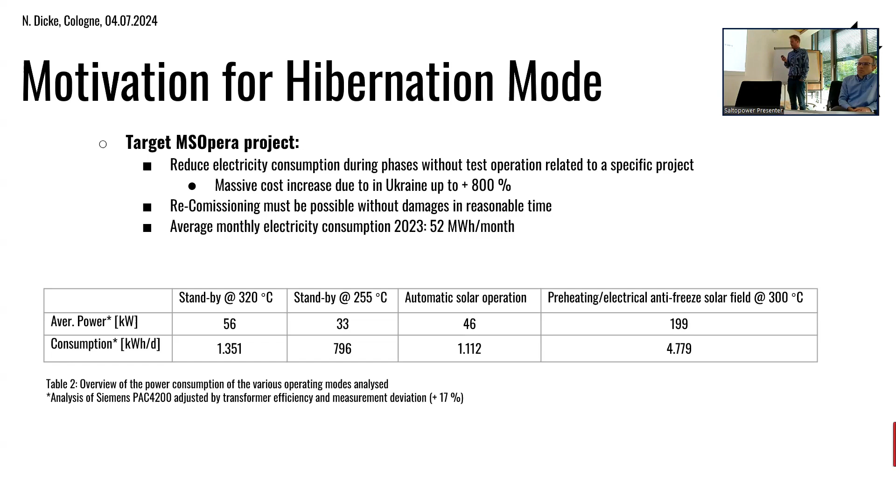We have here the automatic solar operation, which is something in between. And then we have the huge part of preheating and electrical antifreeze in the solar field. So we have impedance heating of the collectors, and if this is running at a set point of 300 degrees, we're using like 2 times what a household would use in a year.

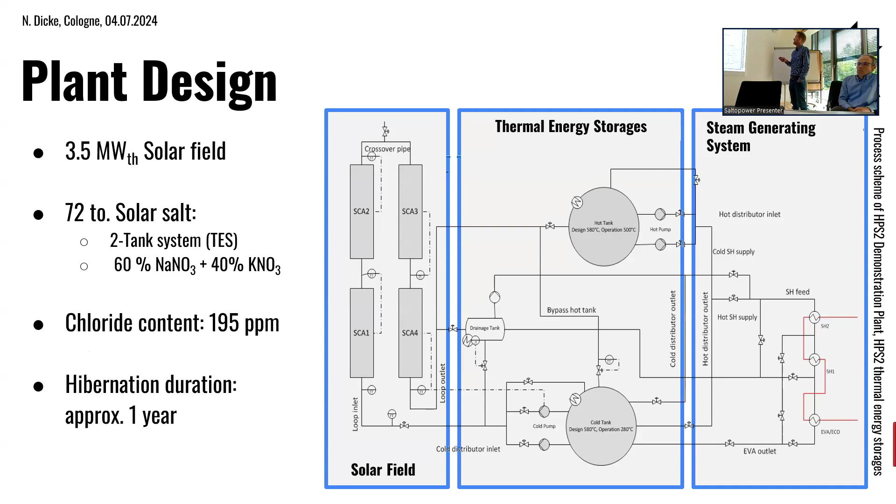Shortly to the plant design, I will just go quickly through it as Paula already presented. So it's a 3.5 megawatt thermal solar field, and we have here our thermal energy storage with roughly 72 tons of solar salt.

And we will also look a little bit more in detail into this part here as we use that for the salt dilution process. We did some measurements of the chloride content beforehand of the salt dilution, but I will come closer to this when we talk about corrosion later.

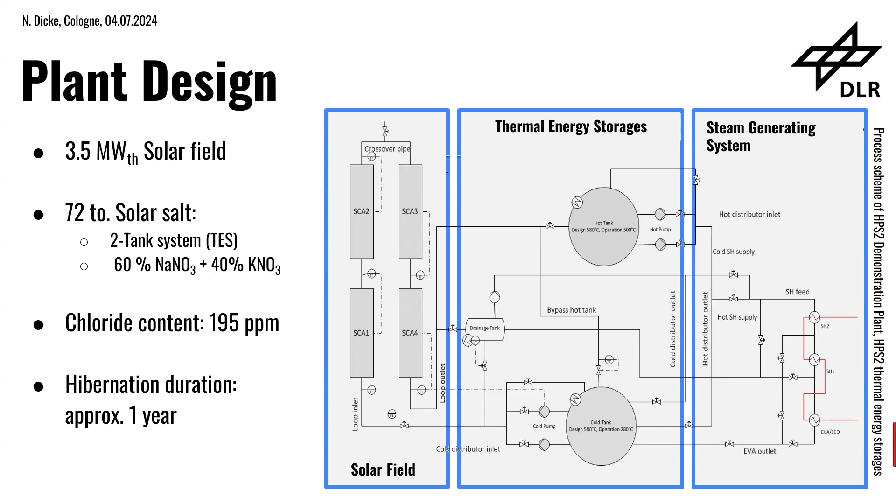And now we are facing a period of roughly 1 year where we are in the hibernation mode, and I will show now the concepts. So we evaluated in general 2 concepts: freezing and melting in the storage tanks, and the other concept is the salt dilution concept.

We did a risk assessment to see what are the risks, how likely they will appear, and what would be the severity of this. And yeah, all processes or all risks which are in the A matrix should be avoided.

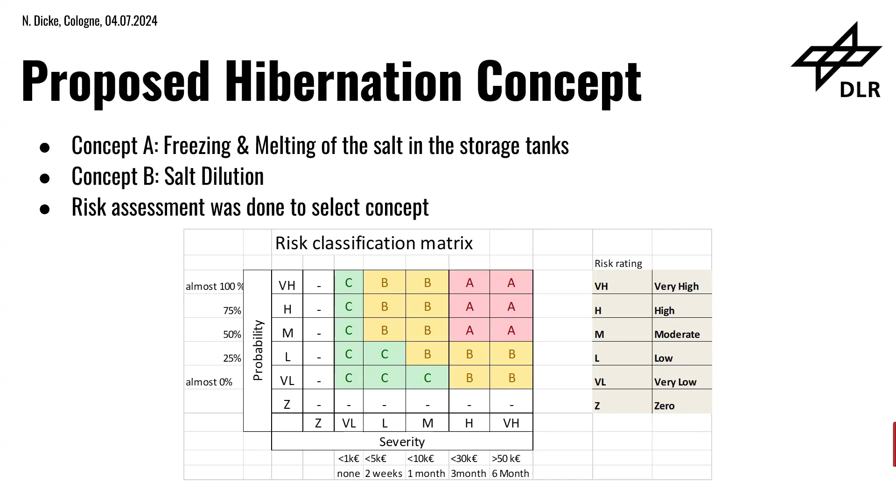Let's take a small look into the freezing and melting. We did some pre-engineering to see what would be the effort, what would be potential risks. So for the heating, or freezing - let's say the melting of the storage tank is a complicated thing, because the freezing you just turn off the heating and everything will freeze. But the melting would be difficult, especially as we don't have trace heating yet around the tanks.

So this would need to be installed. All the insulation cladding needs to be removed. We need to do electrical installation and the installation of the heating circuit on the outer surface. And this, of course, is rather expensive. We had some quotations of 60 to 80,000 euros per tank.

And when it's then stored for a year, the air volume in the tanks should also be conserved with nitrogen in the best case. And then if you start up, the plan is also to preheat the air volume here to have the lowest possible heat temperature gradients. This is also...

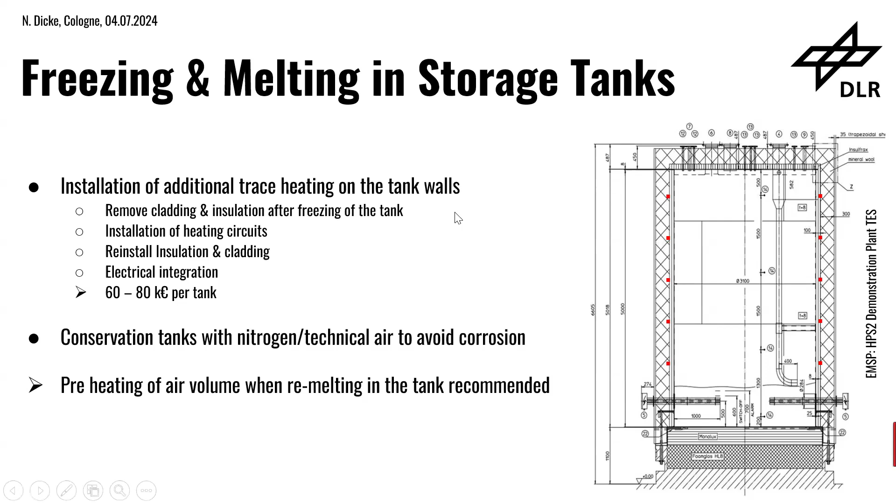We also considered, when we really freeze the whole tanks, do we need to remove some equipment which might be critical? We already saw some frozen pumps in the thesis facility as well as on the EMSP, which could then be melted again without breakages of parts of the pump, as well as instrumentation which could bend or shear, as you also saw in the thesis facility. If you have the density change during the phase change, and the instruments are in the solid blocks, they might move and could bend or be damaged.

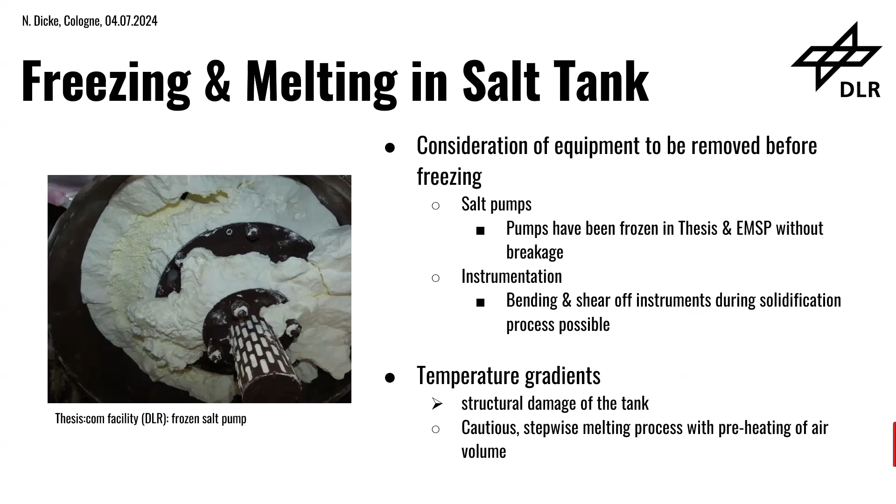One major concern were the temperature gradients during the melting process, because the tanks were also not foreseen to be melted from the outside. This is a critical process where we looked a little bit into detail with a small FEM simulation.

There we checked, okay, if we now wrap trace heating around the tank here, but we cannot put heating on the floor of the tank, what stresses would then result here at the welding of the tank, because this is a critical area where we might see too high stresses.

What we found out is that we should not start installation of trace heating right on the bottom of the tank, because this leads to very high stresses which would most likely damage the tank or the weld in the corner. The solution would be to start installation only 1 meter above the ground and limit the wall temperature to roughly 300 degrees. Then the stresses are feasible in this area.

So the risk was rated as B, meaning it's a feasible concept, but it is extremely costly. And we, of course, have thermal stress to the walls anyhow, because we will have big temperature gradients.

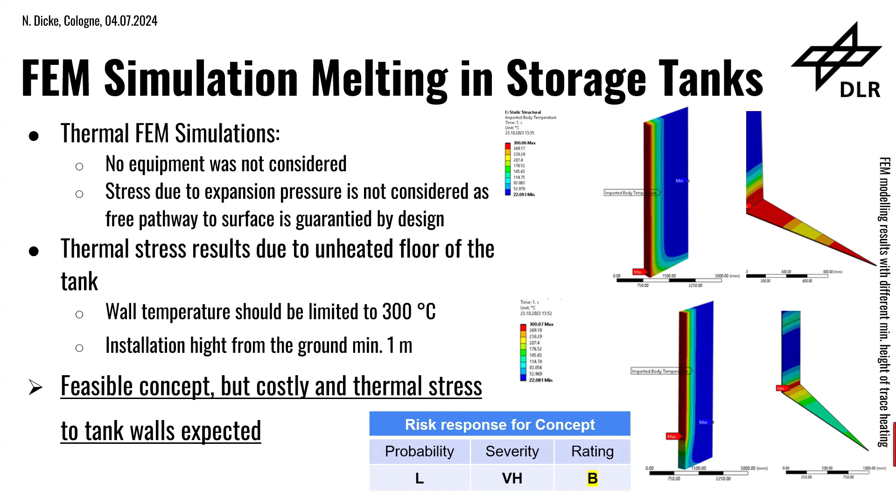Okay, so then let's take a look at the salt dilution concept. Also a very interesting process where we already looked into it with the Evora MSP, which Paula mentioned. This was also one of the reasons to decide for this concept.

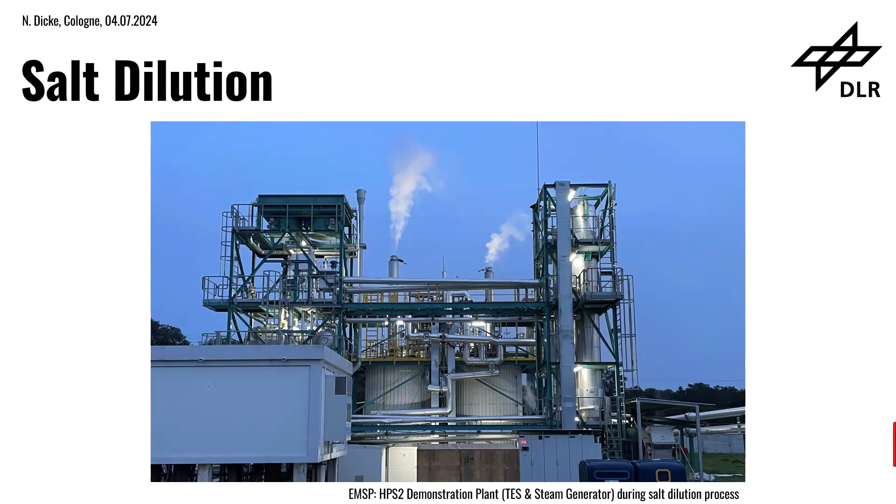So here's a picture where we first produced some steam in the EMSP. As Paula already mentioned, the steam generator here in the front is still in the refurbishment phase.

The salt dilution process involves mixing demineralized water with salts. You can do it with nitrate salts, but also with chloride salts. The hygroscopic properties will bind the water into the crystal structure of the mixture, and therefore you can decrease the melting point of the salt.

So we did some measurements here in the laboratory. We have the pure solar salt, which has roughly a 230 degree melting point. On this axis, you see the water content in weight percent. With rather small mass fractions of water, you already achieve much lower freezing temperatures.

What we were aiming for in the tank is a clear point of roughly 48 degrees, which represents 35% of water. This would more or less exhaust all the possible volume in the storage tanks.

So the idea would be that all tanks are filled to the designed maximum level. When the solution then falls below the clear point, we are in this area. When you are above, everything in the solution would be fluid, with no solid particles. If you are below the curve, then you would see solid fallout.

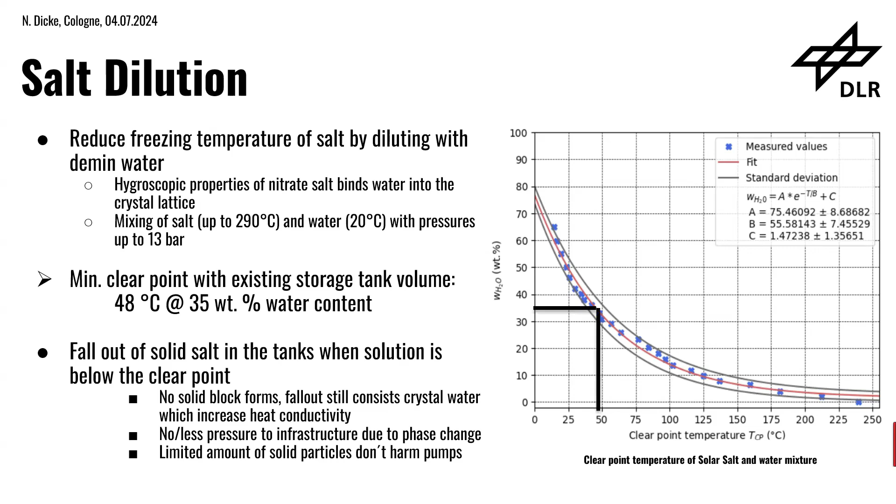Okay, this is the point we want to reach.

One question was the vapor pressure. If you mix like 290 degree hot salt with cold water, you would expect to see strong evaporation and high vapor pressure. We did calculations with a BET model, a theoretical model where you can calculate vapor pressure of this kind of solution. We did it here for solar salt and Hitec.

What you see in the different colors is the water content of the solution. The blue one is pure water. I think all of you know the vapor pressure of pure water. Then we decrease the water content, and what you see is that the vapor pressure also decreases a lot.

What we also saw is that these theoretical calculations do not fit with reality. In reality, the pressures we measured were much lower.

This experiment was also done in HPS1, quite long ago, with our partner Siemens. They did proof of concept in the laboratory where they mixed 12% water into 250-degree solar salt and then measured the pressure, also some temperatures, but here the pressure is of interest. The maximum pressure they measured was 4 bars, so this would be this point, which I marked here.

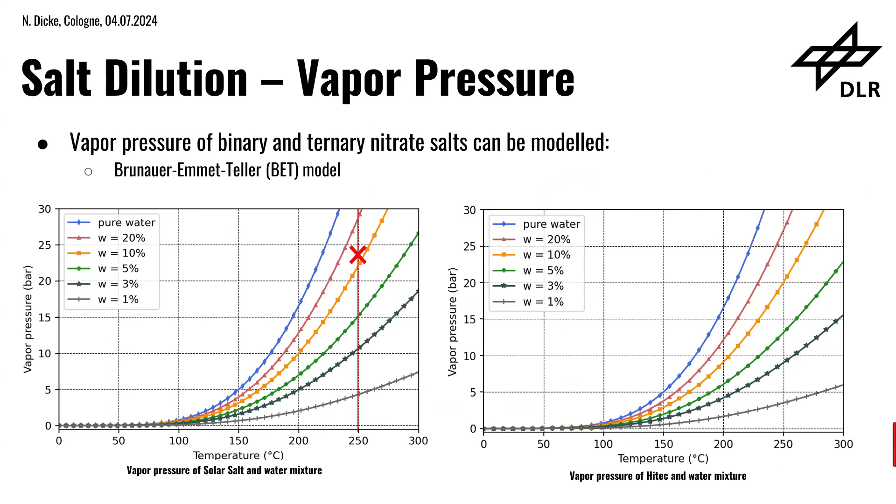From the theoretical calculation, it would be roughly 24 bars. So there's a big difference in between. The model is not really fitting to reality.

Let's come to the topic of corrosion, because it is always a big question mark in the room when we talk about diluted salt solutions. There were different tests done, also in HPS1, where different samples were tested with a water-salt solution of 12% at 120 degrees C for 720 hours.

Another test was done again with pure salt, also for 720 hours, and what came out was that there was no significant corrosion which could be seen. But if you have too high a chloride content, you see active corrosion on the surface.

So tests were done with 200 ppm and one with 500 ppm. Somewhere in between, you have the gap where you will see that the oxidation layer on top will be removed. So if you are right below 200 ppm, the passivation is still okay, and you don't see active corrosion.

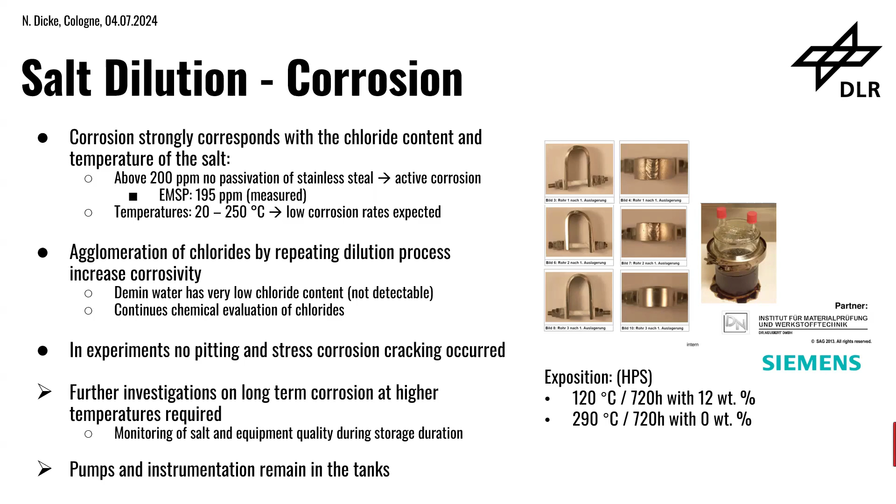Pumps and instruments can remain in the tanks, and the pumps can also be used to pump the media. I will talk about that later in the outlook.

We also did some further corrosion tests in our laboratories. We made a test bench with the steel samples from the EMSP, which we have in the tanks and in the receivers, and put it into a salt water solution for 2,400 hours. We did an evaluation, and there were no corrosion products on the surface, no pitting, and the surface was not roughened. So there were no signals for corrosion.

But what we also found on the surface before cleaning them - this is the original sample, this is the sample after exposure to the water-salt solution - is that there's some salt on the surface. You also see it here. The surface has a kind of crust on it.

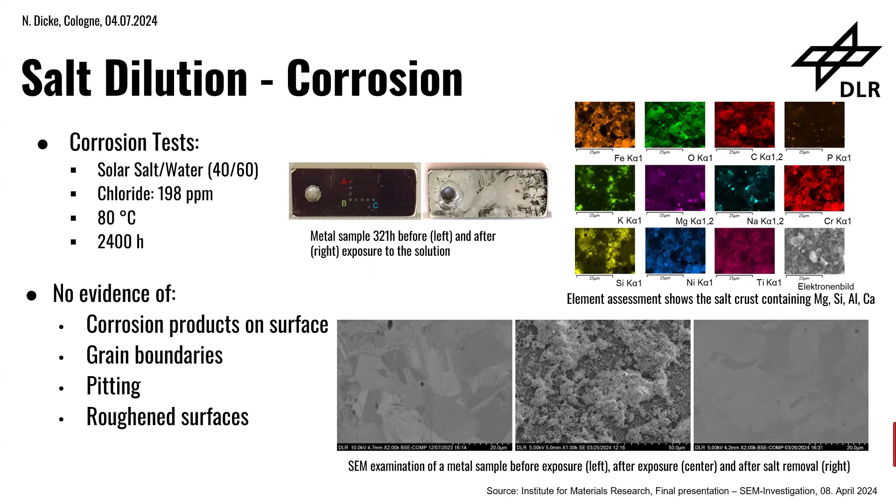And in this crust, several elements were found: magnesium, silicium, and also calcium. This might be from the impurities you mentioned, Thomas, this morning. And the calcium is most likely a remainder from the Yara Molten Salt we had in the facility before.

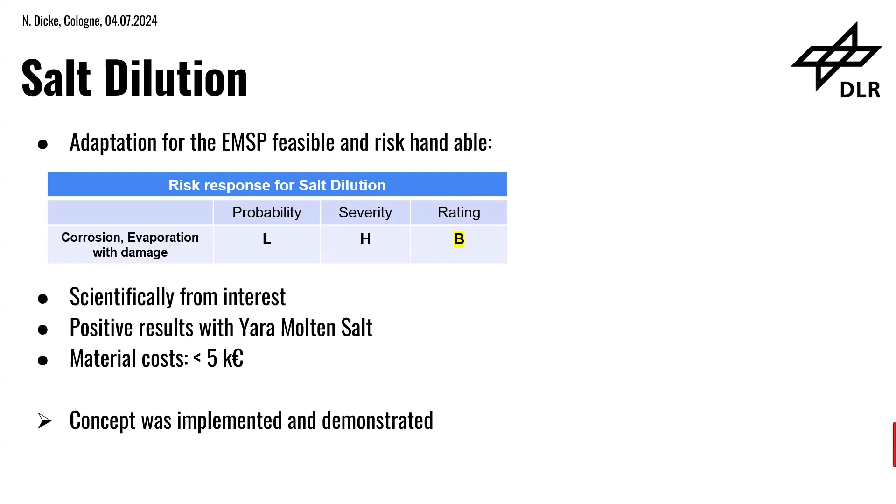So this was the background for the decision. We evaluated it and came to the same rating as we saw on the freezing and melting of the tanks. As the salt dilution process is of high scientific interest, and the costs were really low, we decided to go with this concept.

So here we see the application on the EMSP. We have here the P&ID, or the process scheme, which Paula already showed before. We are now looking only at the tanks, the storage tank area. What we added here is an injection point for water, so we have a valve, a pump, and a demi water tank.

This installation we did not really need to build up, because we used the condensate system of the steam generating system. So in the end, it was only a connection with a high pressurized hose, and then having this injection point.

So we have here the cold pump. Below there is a cold tank. So the salt comes here through the piping.

We have a valve here, a shut-off valve, and then it enters the mixing area, where we inject cold water with this steel tube into the flow direction of the salt. We have a pressure sensor here where we measure the pressure, and of course heat tracing to keep all the salt fluid inside this piping section, so that we are always able to measure the pressure.

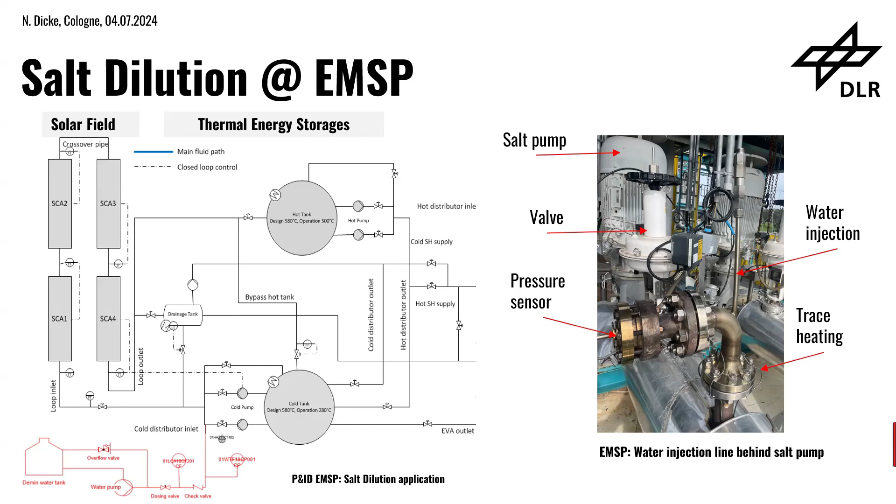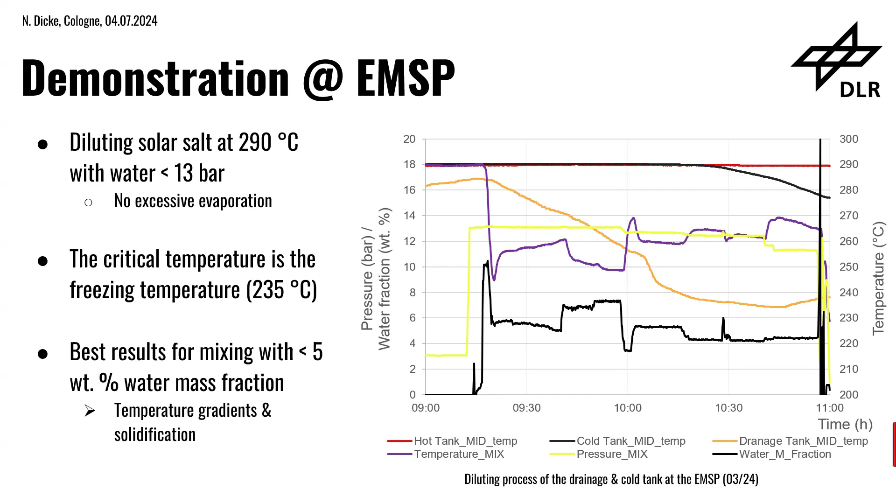And then we injected some water. We reached mass fractions of water here up to roughly 8%. But we saw that with a mass fraction of 5%, you have better mixing, the temperature gradients are lower, and what we see on the next slide is you can also avoid solidification.

At the beginning, temperatures were decreasing until they reached a point where we need to switch over the tanks, because at one point all the tanks need to be mixed. And this was started here.

And what you then see is that the circulation inside the hot tank was reduced, because we were filling from the hot tank into the cold tank to empty the tank more. And then we saw that...

And this is also what we somehow expected to have on the ground area, where you have only salt and no water mixture, because of course the plant was not designed to mix everything perfectly in the tanks. And as the density of the mixture is different, the water tries to go up and will accumulate more on the top layers.

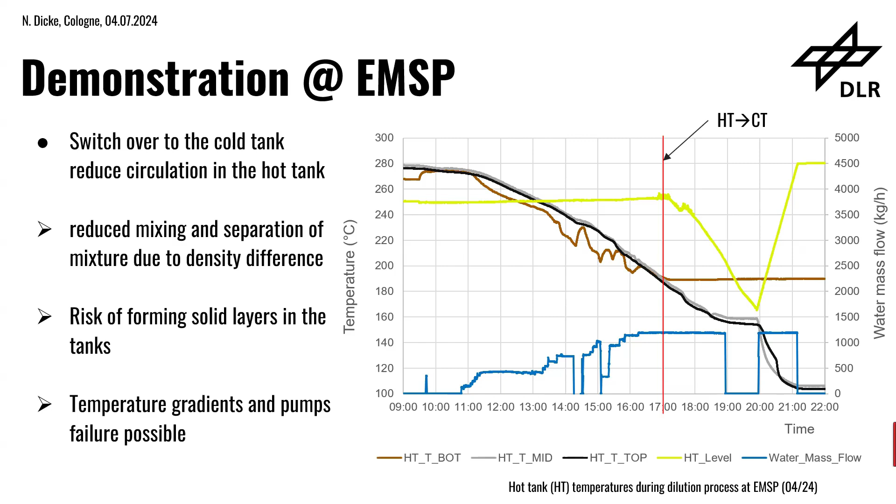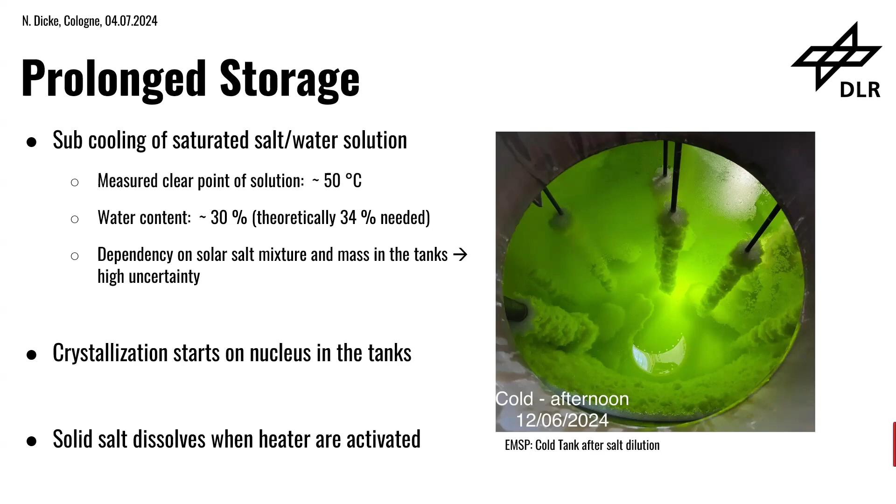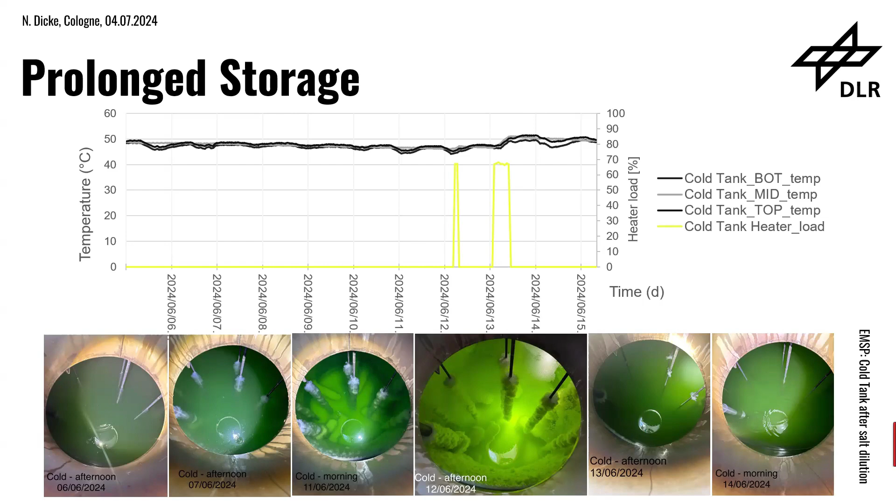So then I will come to the conclusion and outlook. We had a target to reduce the energy or electricity consumption. We met this goal, so we came to an electrical consumption of roughly 400 kilowatt hours per day, which is a reduction compared to 2023 of 78% on average. That's pretty good for our budget, because within MS Opera we spend 250,000 euros on electricity.

The dilution process, and especially evaporation, where we were also a little bit scared, let's say, was easily handleable. We did the dilution process also with only 13 bar, without having excessive evaporation. And what we also saw is that the measured pressures are much lower than expected from the BET model, which we calculated.

So this is something which needs to be further investigated. The mixing in the atmospheric tanks could be challenging, especially if you have a batch operation like we have it now, or had it now.

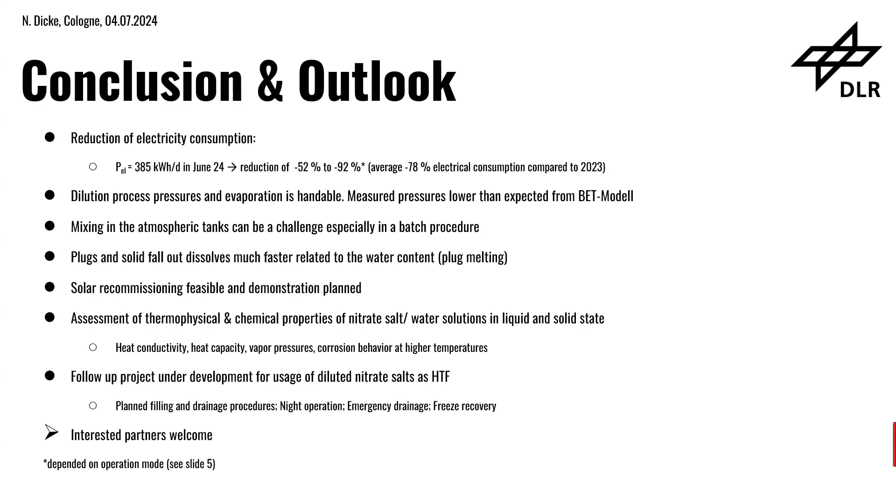At the moment, we are working on a follow-up project because, as I mentioned, MS Opera will end of the year. And we have several possible applications for filling drainage procedures, but also for night operation, emergency drainage, and freeze recovery. If there's any interest from partners, please contact me. And that's it from my side. Thank you.

Questions? Very nice pictures. Looks like out of space. So any questions from the audience? Rita?

Move on to the energy, is the source solution better than without? You mean the heat capacity of the mixture is higher than of pure salt?

Yeah, I guess so, because water has a higher capacity. I mean, it's always a question of the mixture, and if you are above 300 degrees, the water might evaporate if you don't have a pressure vessel. But yeah, it's better for the heat conductivity as well, and also for the heat capacity.

Other questions? Are there questions from the audience? Maybe I have a question.

You mentioned Yara Most or Hitec XL and Solar Salt, and so I know that you did first the Yara Most, and then the solar salt, and you show diagrams, and sometimes it was the one or the other. So maybe you can explain a bit the history and what you did with which one. That's what I couldn't fully get.

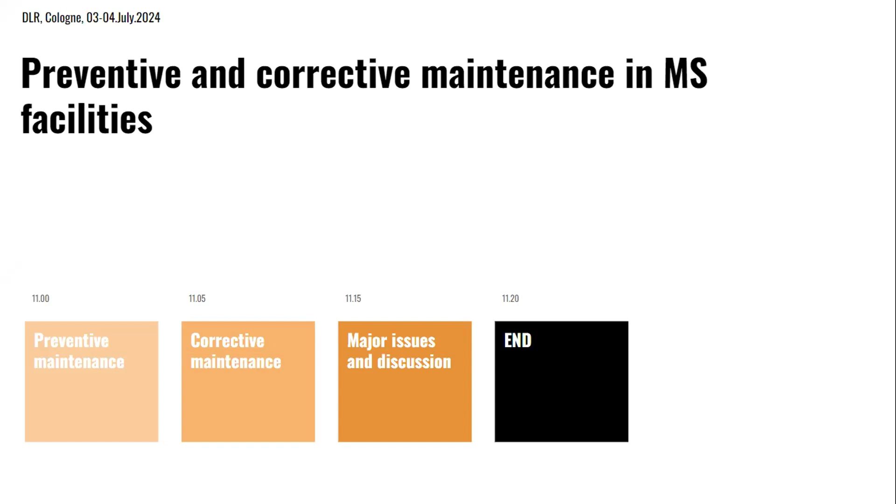Okay, so let's start this last presentation about preventive and corrective maintenance that we held in our facility, the Évora Molten Salt Platform. I will be dividing this presentation into three different sections: preventive maintenance, corrective maintenance, and also major issues that we found during operation and how we tackled them.

Starting with preventive maintenance, well, more or less by definition I think all of you know. So those are all the actions and tasks that you perform during operational periods or idle mode periods in order to conserve your equipment. In our case, we focus especially on critical equipment. The solar field is one of them. All the heating equipment is also critical for us, and of course the molten salt pumps, the valves, etc.

I will focus more this presentation on what we are doing during idle mode operation. Idle mode here is the period in which we are in between projects waiting for next test campaigns. This usually happens in this type of pilot power plants. In commercial ones it's not exactly like this, so we might have slight differences from what is being implemented in industry. In our case, right now we are still managing this in a kind of informal way.

So we have an Excel sheet. This is a screenshot of it, in which we listed all the actions and tasks that the suppliers of the equipment suggest to us to implement in order to conserve this equipment. We also try to implement our own experience with this equipment. For example, specifically the heating elements, the electrical tracing - we see that in the winter season, if we have a rainy season, they are really problematic because sometimes you have problems with your insulation, and quite often you have humidity coming inside. So most likely in the winter season or rainy seasons we will be activating these heating elements more often, and during dry or hot seasons it's not so needed.

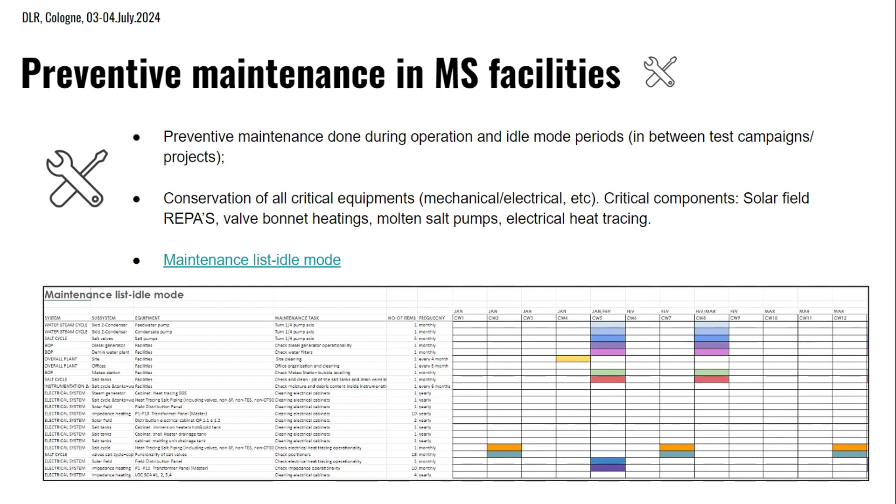In this case, for our facility this is a topic because in the end we don't have a turbine and a generator, so we have high electricity costs, as Nicholas already explained. So we really try to manage either the operation or the idle mode periods in a cost-wise manner, and try to optimize all the operations that we hold at our facility.

And still on this topic of costs, it's really a topic for our infrastructure, and I believe for all the research infrastructures all over Europe and worldwide. So this table just presents briefly what are the categories of costs that we have during idle mode periods.

What we see is that more than 50% is related to personnel costs. Of course we keep the operation and maintenance team on site even in idle mode periods, because the cost of training new operators is much higher than keeping them here. Besides that, they really need to perform this preventive maintenance. In our case, a minimum of two operators is desired. We have more than that just to prepare further operations, but as a minimum we should have, and that's a recommendation, at least two, also for safety reasons.

Besides that, site management - the time of managers on site - at least 30% during idle modes is dedicated only to this preventive maintenance. After personnel, the category that has higher cost is general maintenance, and here I'm not talking about equipment specifically, I'm talking about a bit of everything. This includes cleaning of the sites, cleaning of the mirrors of the solar field, cleaning of the offices, site security, and also some maintenance that we need to contract from third parties. After general maintenance, we have electricity costs.

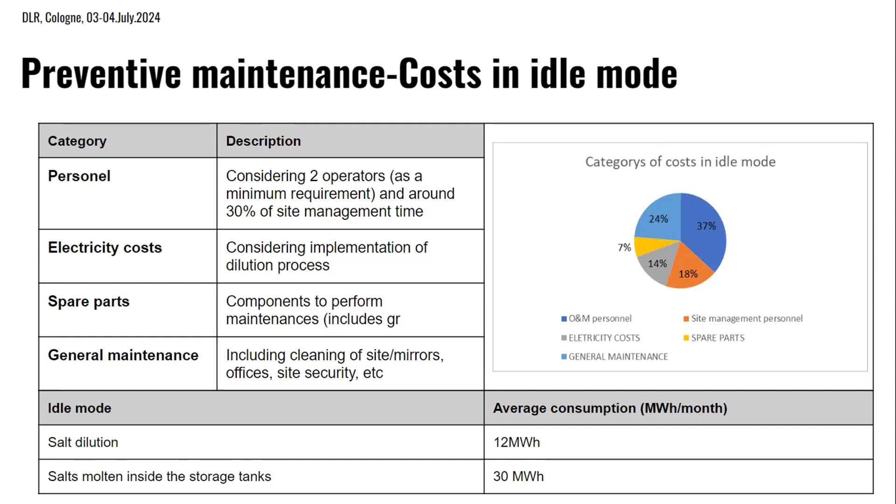In the last part of the table, it's just a comparison between average consumption with salt dilution implemented, versus what the consumption would be if we just kept the salt molten inside our storage tanks. In this case, we have a particularity because we don't have right now the possibility of circulating salts in the solar field due to an issue still to be solved. So if we had chosen to keep the salts inside the tank, we would need to heat them through the resistances installed there.

And so this is it for the preventive maintenance. Passing now to corrective maintenance. By definition, corrective maintenance covers all the tasks you do to deal with any faulty equipment, and you will most likely find it during operation periods.

This table on the screen is a summary of the situation we've had along the time since 2021, when we first started operations. These problems happen both with Yara and solar salts, with the particularity that with solar salts, situations like salt plugs or solidifications are much more critical due to the higher melting point.

Starting to address this briefly: we already saw salt leakages. None of it was really critical, but still we had it, in different locations and for different reasons. We can expect leakages through flanges, for example, and then it's just a matter of adjusting bolts. But we also had it in REPAs, which are critical equipment in the solar field, and that happened due to bad insulation between the REPAs and the metallic support. So in the end, the issue was more related to design or construction than to the technology of the salts.

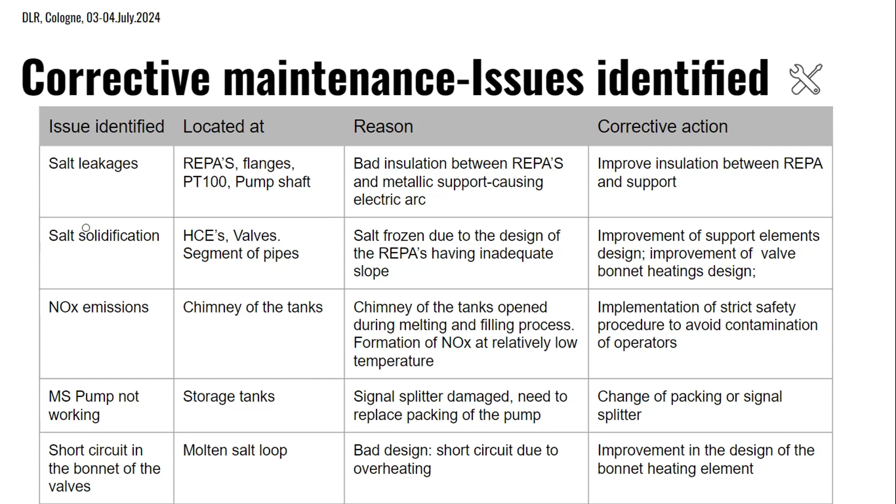Molten salt pump not working, for different reasons. We also faced that a few times, along with short circuits in the valve bonnet heatings. Actually, this was a problem that we had in 100% of our valves, so in the end the conclusion is that this is a design error. They are closed-circuit valves.

Keeping now to this slide, I wanted not to shock you, but to illustrate a bit the problems that we had. Of course, I did not cover all of them in the table; I just summarized the ones that happened more times. For example, in the picture on the left, what you can see is a leakage that we had on our feedwater pump, which is this one here. It was not expected — again, a design error.

We are now working on replacing this pump, but at that time it was really a major issue for us because due to that, we were not able to commission and operate the steam generator. It was leaking at relatively low pressure, I think 20 or 30 bar, which is low for this equipment because it should withstand much more than this.

This is also, in the center, a picture of—it's not an NOx emission, but it is the leakage of the nitric acid that we have. We believe this was the condensation of this NOx that formed the nitric acid. On the right, maybe it looks a bit shocking. Well, it was the biggest leakage that we had in the end, and it was due to one plug, due to the lack of heat tracing of one pipe on the entrance of the drainage tank, which is this one here.

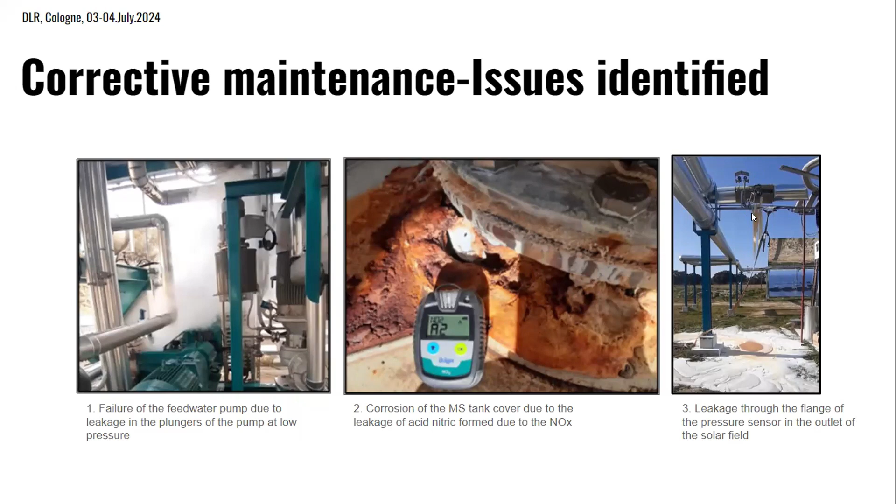Of course, we needed to analyze what is the root cause. This situation could have been a bit critical actually, because the point was we believed that we had all the solar field drained, and it was not the case. At that time we needed to do some maintenance on the pressure sensor at the outlet of the solar field, and whenever the operators just unscrewed the bolts, we had this leakage event. The reason most likely was that our solar field is being drained by gravity.

Most likely it's not only one reason, maybe more than one—incorrect slopes in REPA elements, for example, combined with draining by gravity. With time we had this plug here, so we were not really able to drain the solar field, and that was the reason why we had that leakage. Of course, we know that flanges are places by default where you can expect leakages, but not such a thing as you saw in the last picture.

Also here, it's a problem I talked to you about with the Flowserve valves. Well, this is really a design problem. In the end, what happens is that this heating element is similar to a coil around this part of the valve. The point is that this element was overheating all the time, so it was then short-circuited in the end, and we needed to replace this.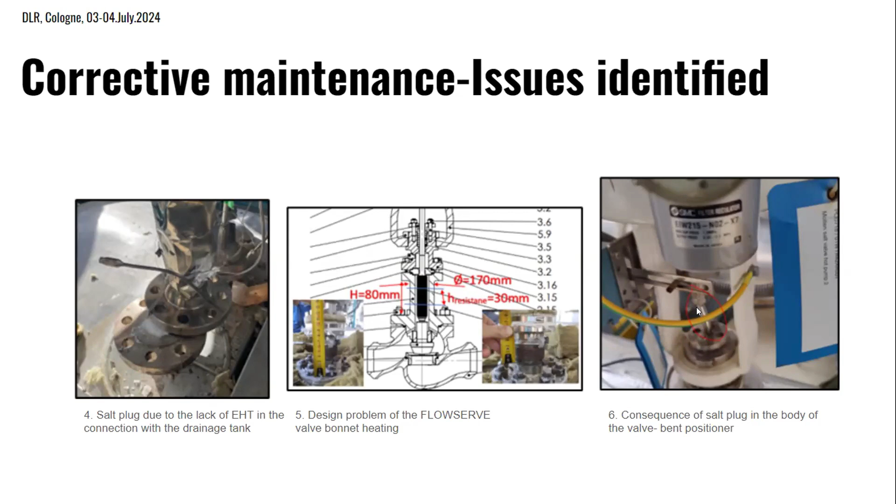Due to this fact, we also already had a problem in one positioner of one molten salt valve because we had a salt plug in the body of the valve. Then someone also tried to activate it manually, and in the end the positioner, which should be erect, was completely bent. I'm not sure if the picture really illustrates it well, but we needed to replace this positioner.

Now getting to the conclusions of what we saw, especially regarding these issues: most of the occurrences are due to design or construction problems, so they are not really related to the salt itself—for example, incorrect slopes, bad insulated spots, or short-circuiting heating elements due to bad design. We are working continuously on improving these issues. The only one that I think we did not yet conclude...

...completely was the valve bonnet heating, although DLR made a big effort to try different designs for it. We are still in the path of improving this, but nevertheless this is a topic more to do with the products offered to the industry. Heating elements, as I explained, are critical, and implementation of these corrective measures solved almost all of the issues identified, even if sometimes not in the timing that we would like.

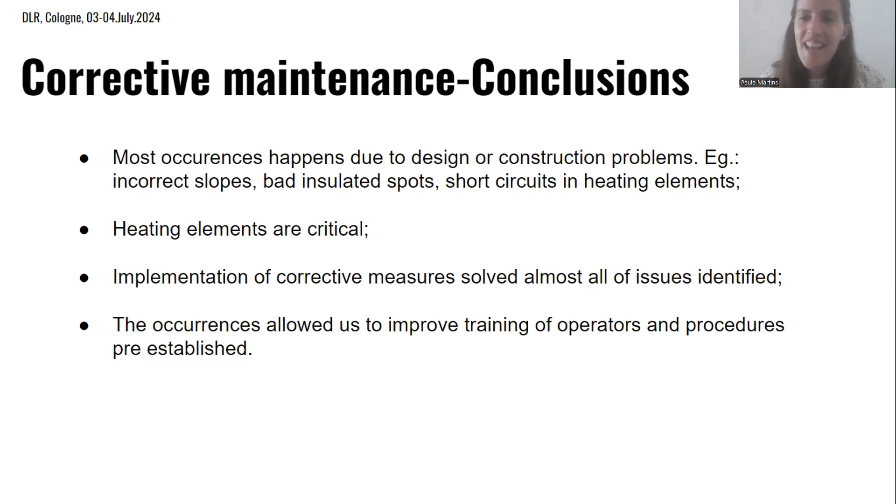This is, for example, the case of the feed water pump, because it implied that we needed to acquire funding to buy another one. These occurrences also allowed us to improve the training of operators and the procedures that were already established, especially the ones related to safety—this is the case, for example, of the NOx emissions. I think that's it from my side. Thank you again for your attention, and if you have any questions, just let me know.